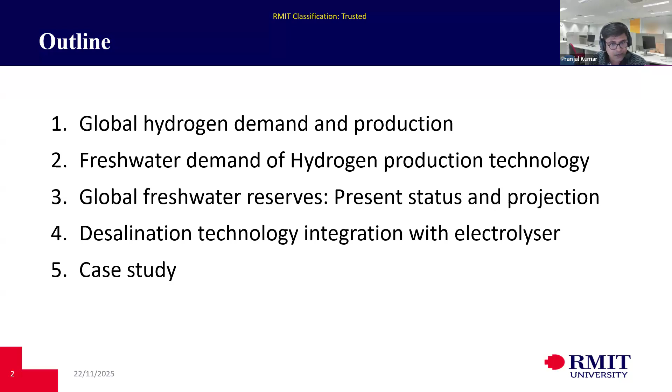If I talk about global hydrogen demand, it is rapidly growing. In 2020 it was 90 million metric tons, and in 2023 it was recorded as 97 million metric tons, expected to reach up to 660 million metric tons by 2050.

As of now, most of the current demand comes from industry. In upcoming years, as we can see in figure 1, demand is also going to be incurred from the refinery and the power sector.

The reason behind it is that if we have extra renewable energy, we can store this energy in the form of hydrogen without losing its energy content. If we store that excess energy from renewable sources in a battery or another form, over time this is going to degrade. After a period, say 2 years, the energy conserved in the first year will be less - maybe you'll get 90%, 80%, or 95% at the end.

But if you save that excess energy in the form of hydrogen, whatever amount you save at the beginning, you will get exactly the same amount at the end. That's why industry is moving toward storing excess renewable energy in the form of hydrogen.

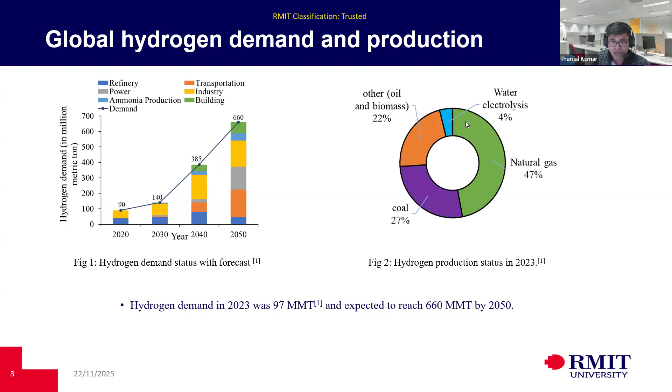As of now, we have 4 different processes to produce hydrogen: coal gasification, natural gas steam reforming, biomass and oil gas, and water electrolysis. Currently only 4% of hydrogen is produced through water electrolysis, so the major portion is produced through steam methane reformation or coal gasification.

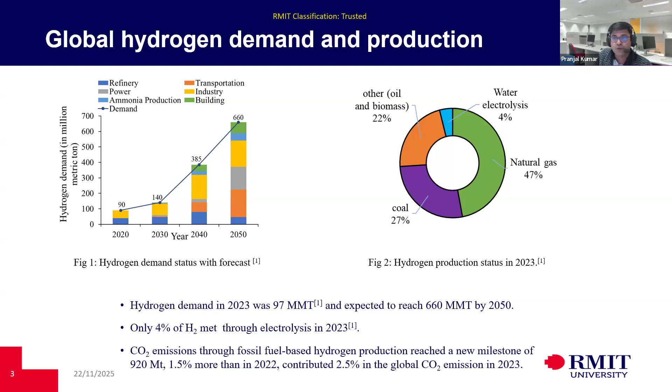The carbon emission through fossil fuel based hydrogen production has reached a new milestone of 920 million tons in 2023, almost 1.5% higher than 2022. These fossil fuel based hydrogen production processes are contributing almost 2.5% to global CO2 emissions.

Similarly, for coal gasification it's 9 to 11 liters per kg of hydrogen production, and the same for biomass gasification - 9 to 11 liters per kg. Now if we talk about water electrolysis, it depends on what quality and what electrolysis process we are using.

If we are using PEM, sometimes it's 9 liters, sometimes 13 liters, sometimes even 70 liters. It depends on the manufacturer building that electrolyzer system, and also what quality of water we are supplying to the electrolysis process.

In this whole presentation, I'm going to focus on the water electrolysis system. In this figure, I am demonstrating the amount of water we need to produce hydrogen, per kg of hydrogen, from this amount of water.

There is another freshwater requirement for different hydrogen production processes, just for cooling or pre-treatment processes, and there are different requirements. For example, the gas steam reforming process consumes almost 21 liters of water for evaporative cooling, which is also included in the hydrogen production process.

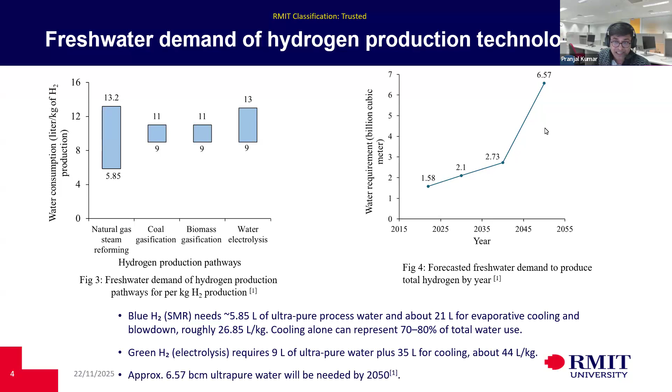If we talk about the global freshwater scenario as of now, in the India subcontinent and nearby nations like Afghanistan and areas near Russia, they are under a high freshwater scarcity region.

If we talk about Australia, where I am right now, they are under low freshwater scarcity, because Australia has lots of freshwater reserves and a smaller number of people. That's why Australia is in a safe zone as of now.

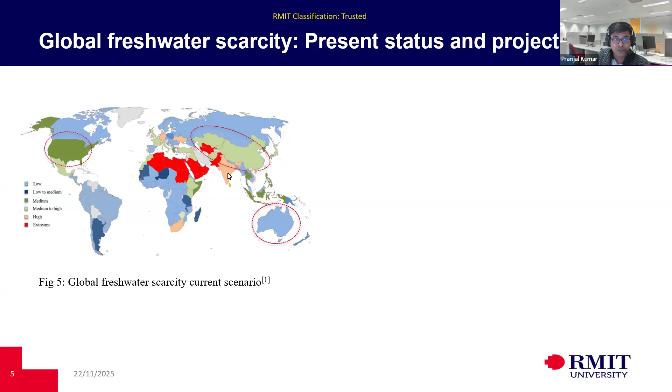These major economies are going to suffer with freshwater because the population is growing. Because population is growing, food demand is growing, water demand is increasing, and industry is utilizing lots of freshwater reserves without being concerned about how we are going to refill our freshwater reserves.

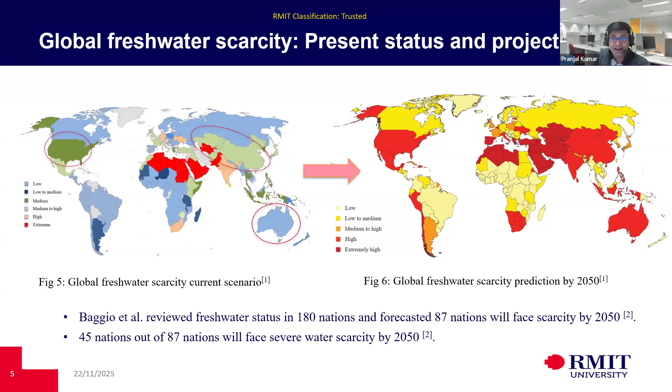A recent study conducted by other researchers reviewed satellite data and found a very interesting fact: regions that previously had lots of freshwater reserves have now had almost one third of that wiped out, and they are getting drier faster than they are getting wetter in comparison through rains and other methods.

So now we have to think, if we are planning to produce hydrogen through the electrolysis process, how we are going to meet the freshwater demand for hydrogen production.

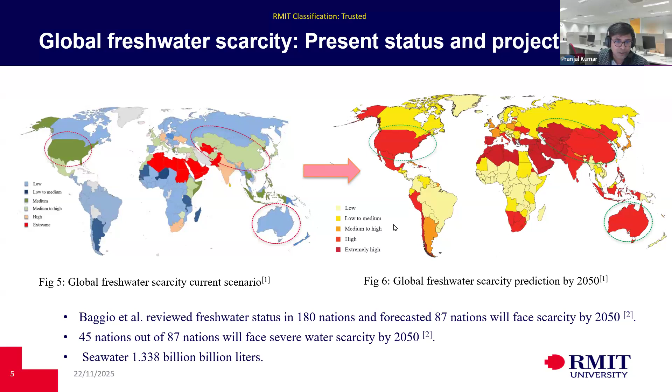There are different kinds of non-conventional freshwater reserves we can utilize, such as seawater, brackish water, or municipal water like household water which we are currently wasting and not refining. Municipal wastewater and brackish water can be conserved, and household water can be stored in one place, then purified and resupplied, along with industrial wastewater.

But my main area of concern is seawater electrolysis. As we know, direct seawater electrolysis is very famous in the market right now. It is a very good process, but there are several challenges with it because of the composition of the seawater.

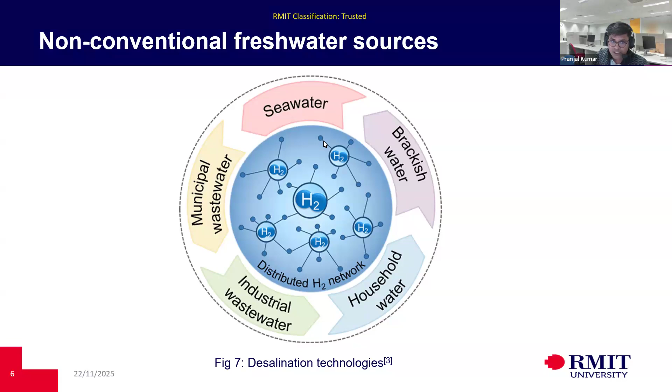Seawater has a huge amount of various components and elements within itself. If we talk about the composition, the seawater has chlorine, sodium, sulfate, magnesium, calcium, boric acid, fluoride, and bromide.

Because of the chlorine and the bromide, it's hindering the hydrogen evolution reaction, and they corrode the electrocatalyst and undergo a competitive reaction with the chlorine evolution reaction against the oxygen evolution reaction, also known as OER. There is another reaction known as HER, the hydrogen evolution reaction.

So our main target was the hydrogen evolution reaction as much as possible. But due to the presence of chloride and bromide, that competition increases because chlorine easily reacts with water, and chlorine evolution reaction starts taking over the oxygen evolution reaction.

There are other elements available, like calcium and magnesium, that cannot be filtered completely, and precipitation causes CaOH2 and MgOH2 formation, which blocks the hydrogen evolution reaction. When the hydrogen evolution reaction gets blocked, hydrogen generation is less, and the efficiency of direct seawater electrolysis reduces over a period of time.

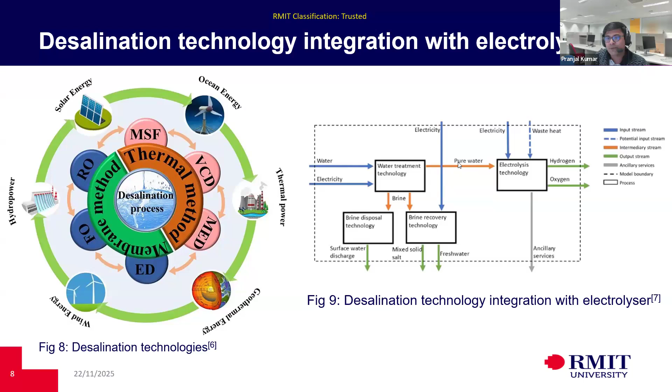So now let's discuss membrane distillation technology. This technology is not commercialized yet, but scientists are working on developing a large scale system, because it's easy to operate and easy to install. It needs only two plates, one on the top side and another on the bottom side. In between there is a membrane.

You can supply saline water from one side and cold water from the other side, and due to the temperature difference on the feed side and the permeate side, the fresh water is transferred from the feed side to the permeate side. So let's discuss what membrane distillation technology basically means.

In membrane distillation technology, fresh water is produced due to a temperature difference that creates a pressure difference between the feed side and the permeate side, and due to the pressure difference, the water gets transferred from the feed side to the permeate side, and that fresh water is collected by different methods.

The way of collecting the fresh water on the permeate side is what categorizes membrane distillation technology. Membrane distillation technology basically has four different types: DCMD, SGMD, VMD, and AGMD. They are categorized based on the collection of the water on the permeate side, because membrane distillation technology has two sides, feed side and permeate side, and both sides are separated by a membrane in between.

On the feed side, hot saline water is supplied, and on the permeate side, cold pure water, not just fresh water, or you can say DI water, deionized water, is supplied. Due to the high temperature on the DCMD feed side, the temperature difference creates a pressure difference from the feed side to the permeate side. The feed side has a higher pressure and the permeate side has a lower pressure due to low temperature.

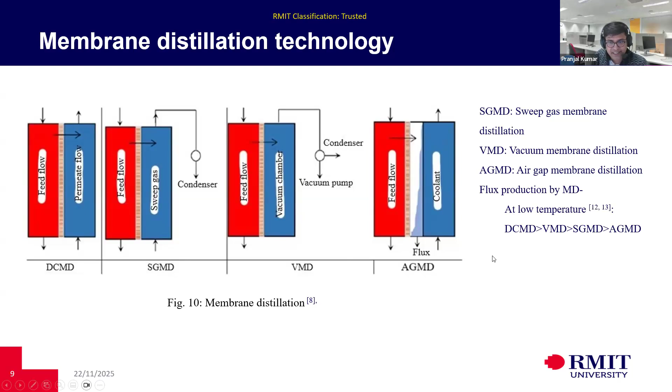In terms of flux, we generally use the term flux in membrane distillation technology. At low temperature, DCMD has a higher flux production in comparison with all other desalination technologies. But when it's operating at high operating temperature, like more than 70 degrees Celsius, then VMD has a higher flux production.

So I did one case study for King Island, near Australia, in between Tasmania and Victoria, and their population is about 1617 in 2020 or 2022. I don't clearly remember as of now. This case study has been published in two peer-reviewed journals. First, under the name freshwater supply for hydrogen production, an underestimated challenge. If anyone is interested in detail, they can go and check this paper.

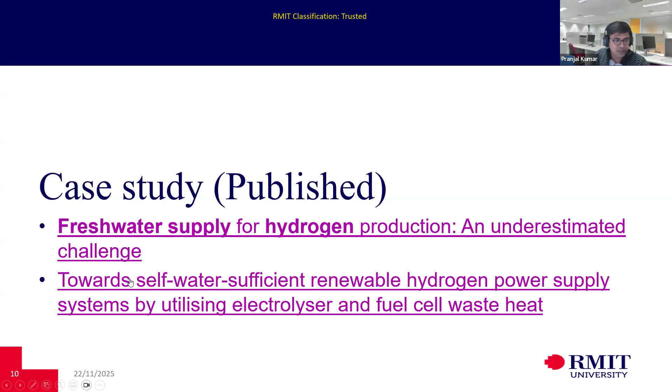And similarly, the second paper is towards a self-water sufficient renewable hydrogen power supply system by utilizing the electrolyzer and fuel cell waste heat. And this is King Island. Basically, this is the whole of Australia. This is Victoria here, and this is Tasmania. In between there is King Island.

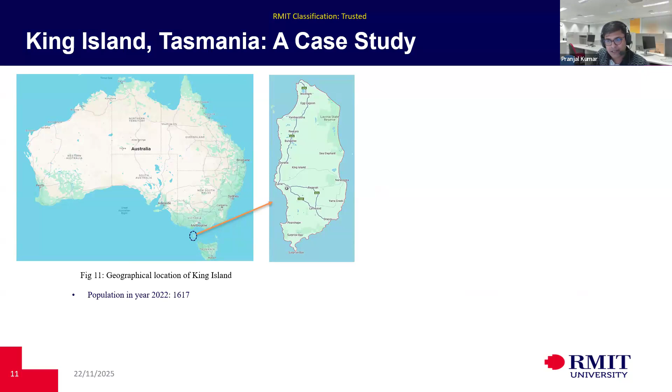The reason behind the selection of this site is the low level of rainfall in previous years. If you look at the historical rainfall percentile data of King Island, at the corner over here, it shows the deficiency, and most of the population lives on these islands or on the coastal areas. So that is the main reason behind the selection of this site.

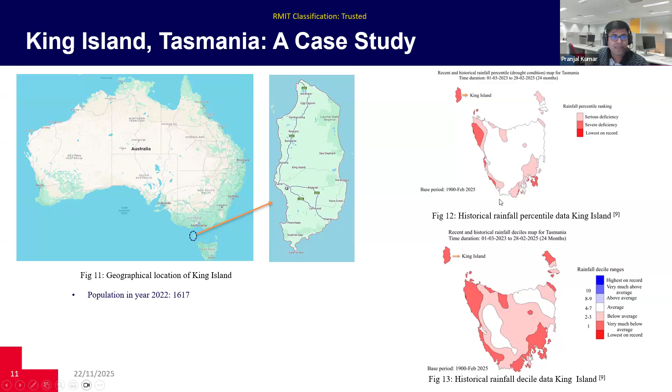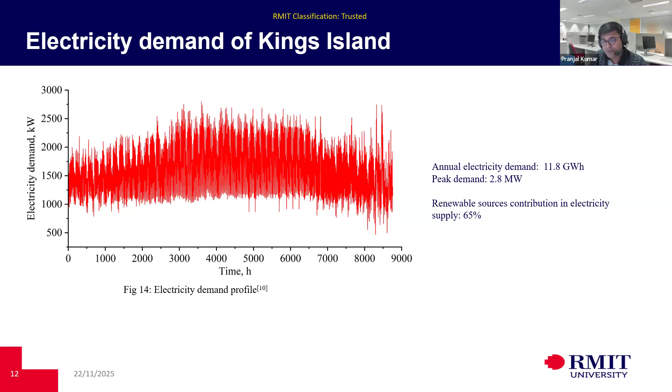So my main agenda was to remove that diesel generator and install a hydrogen electrolyzer and fuel cell system to meet the rest of the electricity demand, so we can reduce carbon emissions through the renewable energy system. I used Homer Pro software and MATLAB software, including spreadsheets, to design my whole system. And I designed 4 different kinds of systems.

So we have to make sure we can meet that small amount of energy requirement through another energy storage system. And the better thing is installing a battery instead of a diesel generator, because the battery is not going to emit any carbon, but there is some carbon emission from the manufacturing of the battery. We cannot deny it.

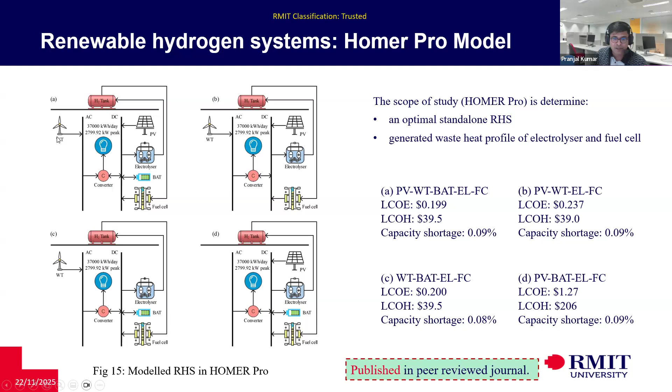We can use 80% or 90% of the hydrogen from the hydrogen tank to meet the demand, and the rest of the demand is going to be met either from the battery, the wind turbine or the PV system. Now I'm going to talk about figure number one, because this one has the lowest levelized cost of electricity.

Throughout the year, the hydrogen produced from the system was recorded as 69,954 kg per year. I selected a Siemens electrolyzer that basically consumes 17 liters of water to produce 1 kg of hydrogen, and that 17 liters is written on their manufacturing data sheet. So I am using their data, and then I assume if this freshwater requirement can be reduced to 9 liters to produce 1 kg of hydrogen, how much freshwater we need to meet the freshwater demand of this electrolyzer.

In the system, the electrolyzer operates annually for 4,579 hours and produces 69,954 kg. Based on the 17 liter freshwater requirement to produce 1 kg, it needs almost 1189 cubic meters per year of fresh water. And if that electrolyzer consumes around 9 liters of fresh water, then it needs almost half of that, not exactly half, 629.59 cubic meters per year.

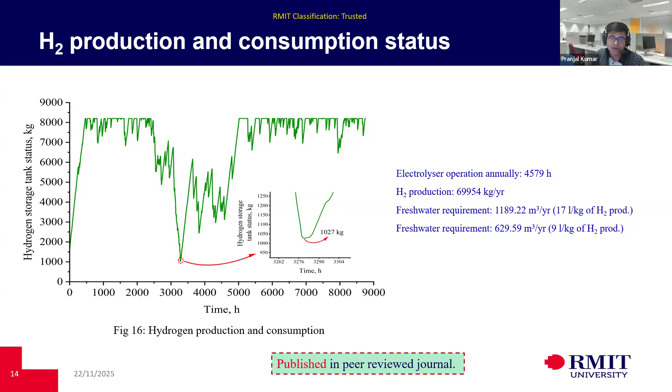My target was to understand how much waste heat was generated by the electrolyzer and the fuel cell during this operation, and whether I can recover this waste heat to energize a desalination process. So I can desalinate seawater and supply that water to the electrolyzer to reduce the burden on freshwater reserves. I did some manual calculations in Excel, and found that almost 96.5% of the waste heat from the electrolyzer can be recovered, and similarly almost 67% of the waste heat from the fuel cell can be recovered easily.

My goal was to find a suitable desalination technology which can be integrated with the electrolyzer and the fuel cell system, to recover waste heat at low temperature. I assumed my electrolyzer system is operating at around 65 degrees Celsius, and the fuel cell system at 65 degrees Celsius, but the fuel cell system can go up to 100 and 120 degrees Celsius, and similarly the electrolyzer. I was working on the PEM, proton exchange membrane electrolyzer, and the proton exchange membrane fuel cell system.

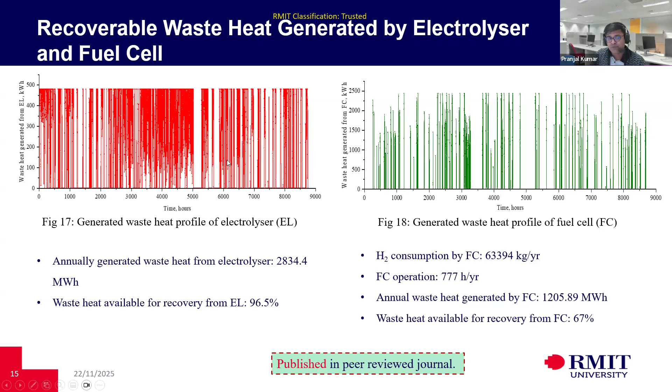If someone is going to install a solid oxide fuel cell system or a solid oxide electrolyzer cell, they are going to operate at high temperature. Then we can easily recover the waste heat for desalinating seawater, and integrate MSF or MED technology to produce fresh water to meet the freshwater demand of the electrolyzer. But in my study, I was working with the low temperature electrolyzer and fuel cell, so I installed a DCMD system, which has a high flux production capacity at low temperature, below 70 degrees Celsius. So I selected that one.

If the temperature goes above 70 degrees Celsius, I would definitely go for VMD, that is a vacuum membrane distillation system. This is a simple schematic of the membrane distillation system. It has two compartments: one is the feed side compartment, and the other is the permeate side compartment. On the feed side, the feed comes after recovering heat from the electrolyzer or the fuel cell system. This heated saline goes through the feed side compartment of the DCMD system, and from the permeate side, fresh water is supplied. And due to the temperature difference, on the left hand side, the feed side, high temperature is there.

On the right hand side, the permeate side, there is low temperature. Due to this temperature difference, separated by this membrane, and the membrane has very small pores, the pore size is somewhere like 0.22 micrometer. So due to this temperature difference, a pressure difference gets created, and the fresh water is collected on the surface over here, and then it gets transferred through the pores to the right hand side, the permeate side. And there is no saline.

Maybe over a period of time, like if our membrane desalination system is operating for 2 or 3 months or more than 5 months, then maybe we can see some crack on the surface of this membrane. So we have to do regular maintenance to avoid any contamination on the permeate side.

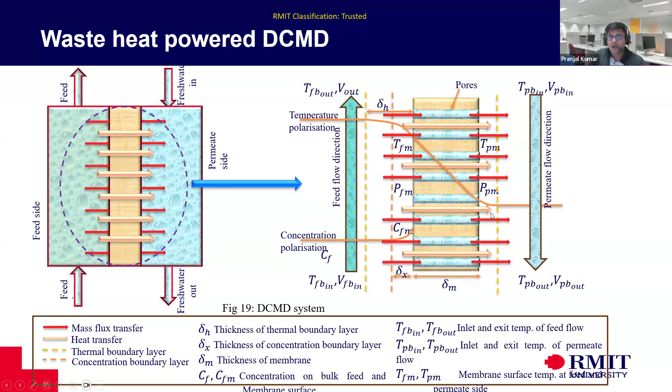And this is how the temperature polarization and the concentration polarization work over this membrane surface, shown in this graph. As you can see, when the flow is flowing through the feed side compartment, as soon as we move away from the membrane surface, the saline water moves very fast, and over a period of time, due to the temperature difference, the salt gets deposited over this membrane surface, and because of that, concentration polarization happens, which reduces the flux production of this DCMD system.

So now the main question is how much fresh water we can produce from this DCMD system through waste heat recovery of the electrolyzer and the fuel cell system. So first I looked at how much waste heat recovery can be done. We can recover almost 96% of the electrolyzer waste heat, and from the fuel cell almost 67% of the waste heat, which is the effective waste heat available for recovery. But generally, electrolyzers or fuel cells generate more than that, but we cannot recover 100% of that.

The reason is that when we start our electrolyzer or fuel cell system, some amount of energy is stored within the system body itself, because at the beginning the system is at low temperature, and over time it warms up and stores some energy within itself. That energy we cannot recover. So I subtracted that amount and calculated how much energy we can recover, and I got 96.5% of the waste heat can be recovered from the electrolyzer, and 67% from the fuel cell system.

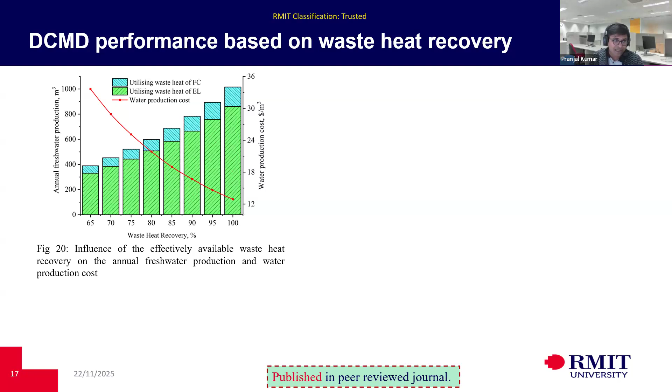So when I say 100% here, 100% waste heat means 100% of 96.5%. If we can recover that 96.5% of the waste heat effectively, then we can meet almost 85% of the annual freshwater demand of the electrolyzer. And this demand is met when we consider 17 liters of fresh water required to produce 1 kg of hydrogen. If we consider 9 liters of fresh water per kg of hydrogen, then this amount goes beyond the demand, because it's 1016 cubic meters annually, and the demand was 629.59 cubic meters. That is too much.

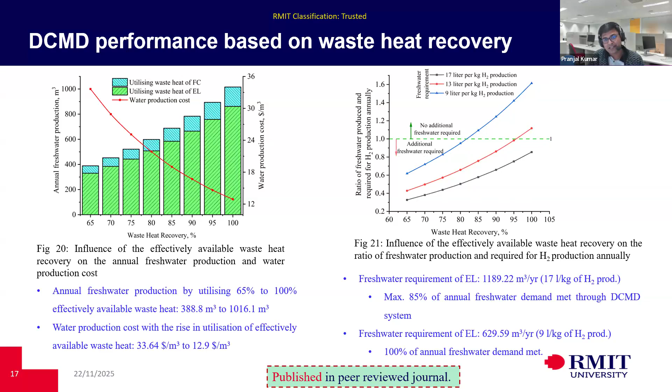So this is what I'm showing in this figure. I have considered freshwater demands to produce 1 kg of hydrogen: one is 17, another is 9 liters. If we reach up to this point, then in the upper zone there is no additional freshwater requirement. In the downward direction, we need additional freshwater to meet the demand to produce hydrogen efficiently without touching the freshwater reserve.

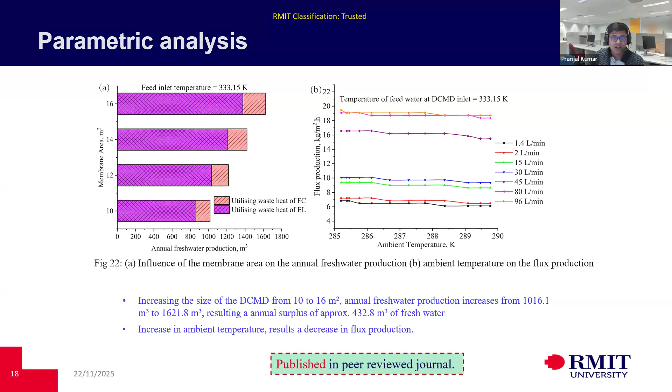So now the main concern was, if we are going to integrate the DCMD system, how is it going to impact the cost of the whole renewable energy system? Will it impact too much or just a small amount? So I just changed the membrane area. Membrane area means the DCMD size, the direct contact membrane distillation system size.

So I increased the DCMD size from 10 meters square to 16 meters square. And then I calculated the change in the cost separately: how much the capital cost is going to change, how the operation and maintenance is going to change, what change we are going to see in the replacement cost, and how the levelized cost of hydrogen is going to change.

So surprisingly, the change was not that much. If you talk about the capital cost, it was like 0.24 to 0.26. It depends on the area which we are considering. If we are considering 10 meters square of DCMD size, then the change in the capital cost is like 0.24, the operational cost is going to change by 0.87, and the levelized cost of hydrogen is going to change by 0.34 percent, not more than that.

And if we increase the membrane size of the DCMD system to 16 meters square, then the capital cost will change by 0.26%, and the hydrogen production cost is going to change by 0.37% only. That means it is feasible to integrate the DCMD system, or not just the DCMD system but a membrane desalination system, to recover the waste heat from the electrolyzer and the fuel cell system to produce fresh water for the hydrogen.

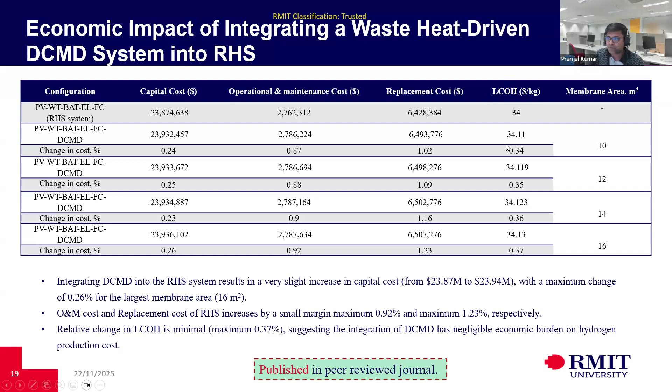If I am planning to produce hydrogen using the complete energy produced from the wind turbine or the PV system or both, then the hydrogen production cost is going to be less, and it will come down below $4 per kg. And after doing this simulation modeling, I developed an experimental setup.

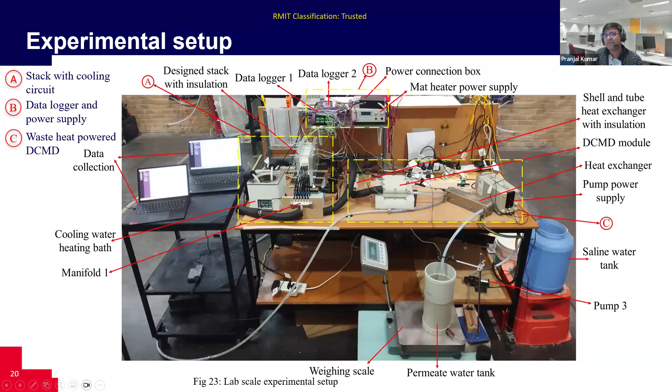But I found that if I supply cooling water to the stack immediately when it reaches 60 degrees Celsius, there was a premature temperature drop. So I waited a few more minutes to reach a higher temperature, doing hit and trial multiple times to find a suitable temperature, since I had to achieve my desired operating temperature.

So you have to do a couple of hit and trial runs and get a plot, so you can see when that temperature is reached, you can start supplying cooling water and get an equal amount of heat all the time without losing the temperature of the design stack.

When it reaches approximately 340 Kelvin, I started supplying water, and the temperature of the stack drops to somewhere around 333.5 — it will not go below 333, but will reach near that value over a period of time. If I zoom in, it looks something like this.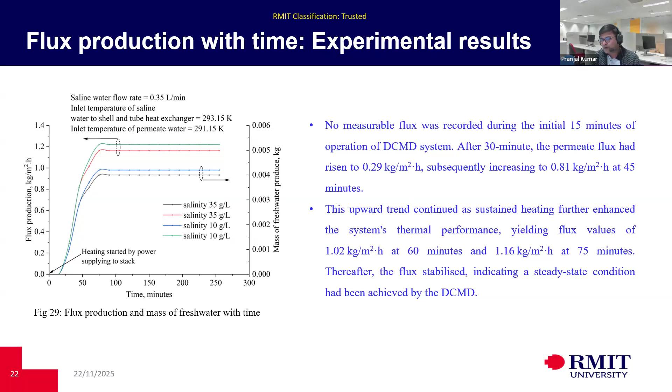Another main point was how much salinity was in the produced fresh water. I varied the salinity in the saline water, and recorded that the salinity in the produced water was between 3 to 5.5. It was not too much.

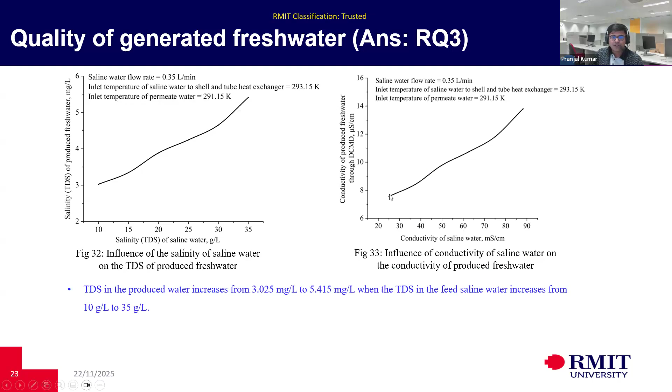I also measured the conductivity, because the performance of the electrolysis depends on the conductivity of the fresh water. It increases from 7.563 micro Siemens per centimeter to 13.81 micro Siemens per centimeter at 291.15 Kelvin, when the conductivity of the feed saline water increases from 25 milli Siemens per centimeter to 88.2 milli Siemens per centimeter at 293.15 Kelvin.

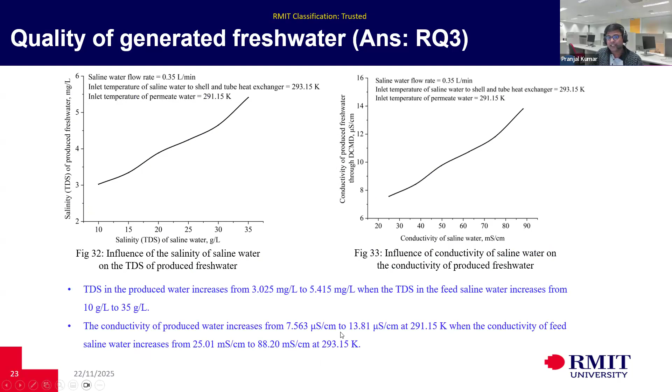Now I'm going to show which software I used to design my renewable energy system. That software was basically HOMER Pro, and I integrated it with MATLAB. Then I used a spreadsheet, or there is another software you can use, called TRNSYS. I also work on TRNSYS, but basically I've worked on this one since the beginning, so I'm presenting that one.

Please let me know if you can see my screen for this one. No, I think it is not visible. The software screen? Yes, yes, yes. No, it is not visible. Actually, your presentation is visible. Okay, just give me one second. Is it visible now? Yes, visible? Yes, yes. Okay, thank you, thank you.

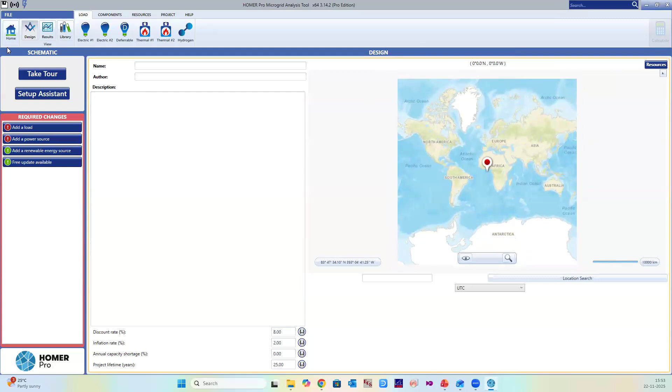So this is the HOMER Pro software, and as you can see, it has several components, like loads, component, resources, projects, and help. First, what you need to do is go through here.

First you have to select the electricity demand, and find if there is any peak month like January, July, or any. No, so you can select none. Then you have to select what kind of energy profile you are going to give: residential, commercial, industry, community, or blank. Blank means you are going to assume you don't know what the electricity profile is for.

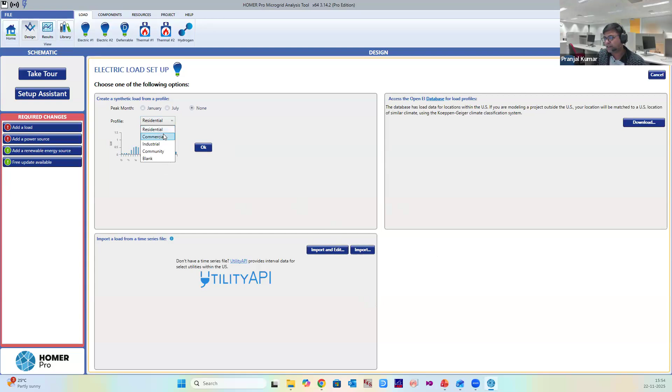So you are going to select blank, or if you know the electricity demand is related to residential or commercial, you can select one of them. Then you click import and edit that file, click okay, and you will see the profile. For example, I'm going to choose residential, click okay, and select no peak month, so it's okay.

When you select this, you'll see another screen showing the electrical load of the resident throughout the year. As you can see here, this is the average kilowatt-hour per day, average kilowatt, peak, load factor. What type of load is that—is it AC or DC? Then you can scale this whole electricity demand by any number.

You can change this number by putting it over here—say 12 kilowatt, or 15, 20, whatever it is. It's up to you if you want to do that. And here is the source, like a random variability—it's day-to-day variable. What does day-to-day variable mean? It shows how the electricity demand is changing day to day. This software gets from the data a 10% change in the electricity demand.

Similarly, what is the time step? Time step means like hourly—what is the frequency of change, hourly?

So it's 20% change. It automatically gets this from the data—it's not assuming from their side, it's getting it from this data. And then based on that, you have to jump to the component where you are going to select.

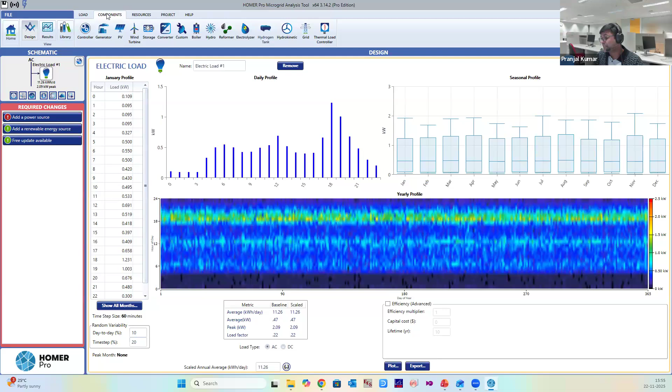You are planning what kind of system you want to design. Then you can select the PV system. If you want to plan a PV system, you can select—there is a different kind of catalog. You can go and select any PV system from here.

Let's suppose I'm just generic flat plate PV, then I'm going to add it. Then you have to put in capital cost, replacement, and other details. Here you can see HOMER Optimizer, Search Space—you can fix the size of that PV system.

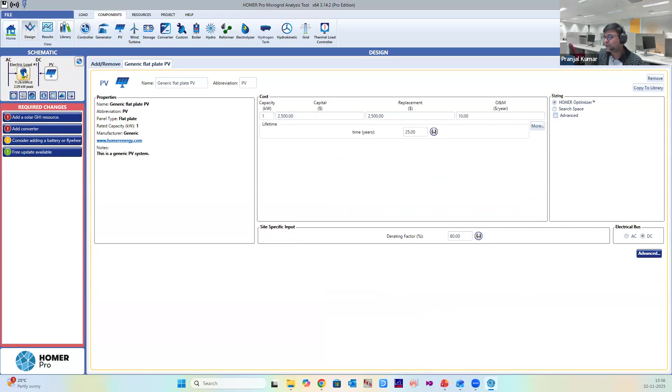On the left hand side, you can see this PV system is going to produce DC power, and your demand is in AC. So you need a converter—you need to install one converter that is going to convert this power to meet the demand.

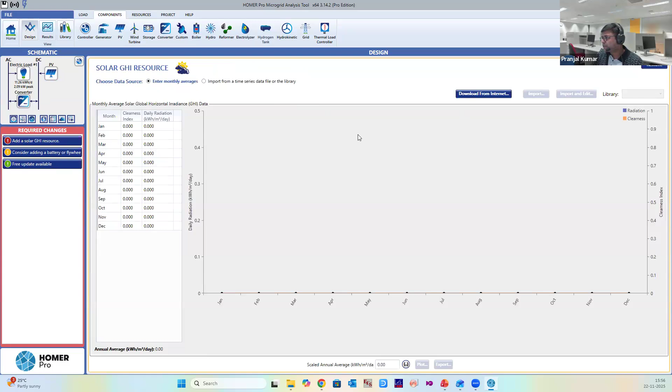And then you have to add GHI, that's the global horizontal irradiance. You have to give the solar data because you need to produce electricity through the PV panel. So first you are going to select here, and this is the resource downloaded.

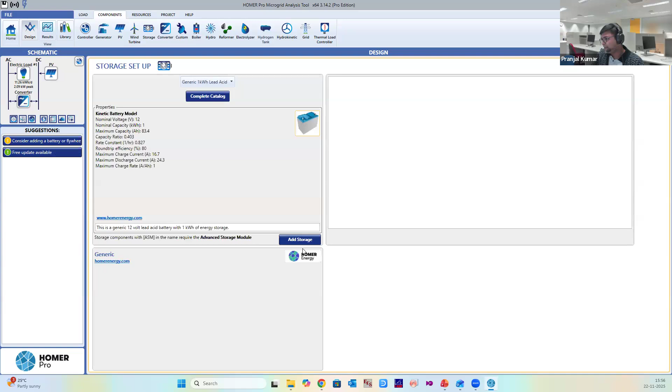Now you have designed your system, but it says consider adding a battery, because sun is not available 24 hours. So we have to consider one battery—I'm going to add a battery energy storage system, or you can add any other energy storage system, like a boiler, electrolyzer, or fuel cell—anything you can add.

And then you just have to go and run the calculation, and it will start calculating the system automatically. This is the best system it found. If you go to the tables, you can find multiple options—this was the category, this is the best system the software found, and this is the overall list.

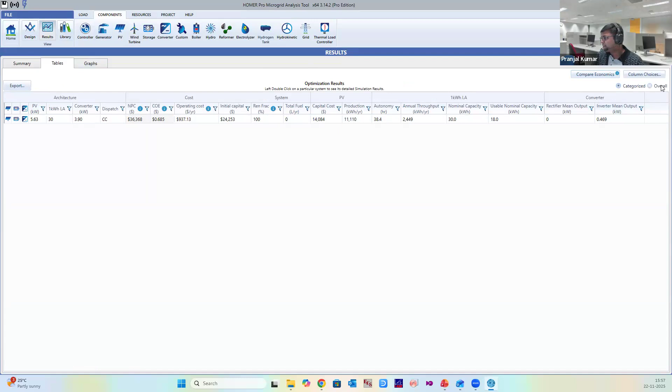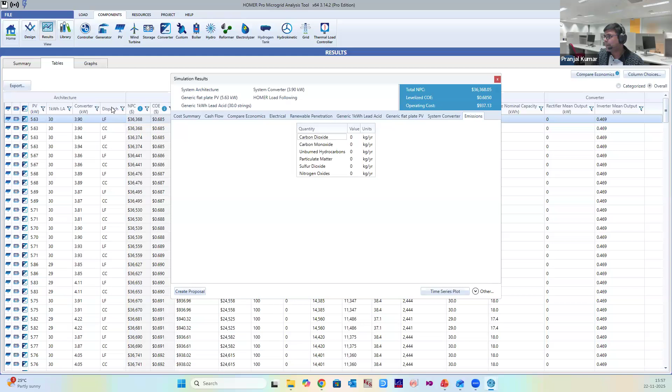You can see there are plenty of combinations of this arrangement. You can pick any of them based on your requirement, or click on any one. You will get all the details—cost summary, cash flow, compare economics, electrical, renewable penetration, generic, anything—you will get it from here. Based on that, you can design your system.

And this was the software demonstration. Thank you for patiently listening to me. I'm coming back to my presentation. If anyone has any doubt, please let me know.